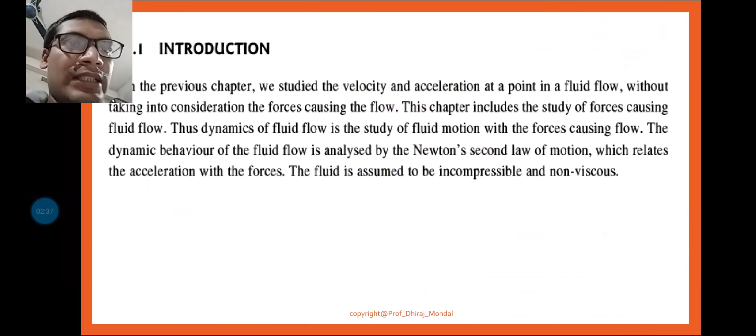I am going to discuss fluid mechanics, ME 303, for BTech second year students, and today we are going to discuss fluid dynamics. Last class I discussed the introduction to fluid dynamics, where Euler's equation of motion was discussed. We have seen this equation, which we got when the fluid is flowing through a streamline.

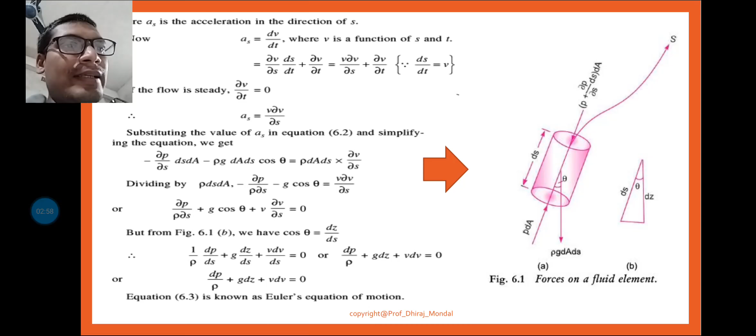Today we will be discussing Bernoulli's equation of motion, and how we can obtain it. Last class I told you that Euler's equation of motion is: del P by rho plus G into dz plus V into dV is equal to 0. This is Euler's equation of motion. Now if I integrate this equation, the integration of 0 is a constant, so integrating Euler's equation of motion, we will get Bernoulli's equation of motion.

So after integrating this equation, which equation do we get? P by rho plus G into z plus V square by 2 is equal to constant. Now, dividing by G, I can write it as P by rho G plus V square by 2G plus Z is equal to constant. This is Bernoulli's equation of motion.

So how is it obtained? By the help of Euler's equation of motion - after integrating Euler's equation of motion, we get Bernoulli's equation of motion. Now the question comes, what is this P by rho G? Basically this P by rho G is the pressure energy per unit weight of the fluid, very important, also called pressure head.

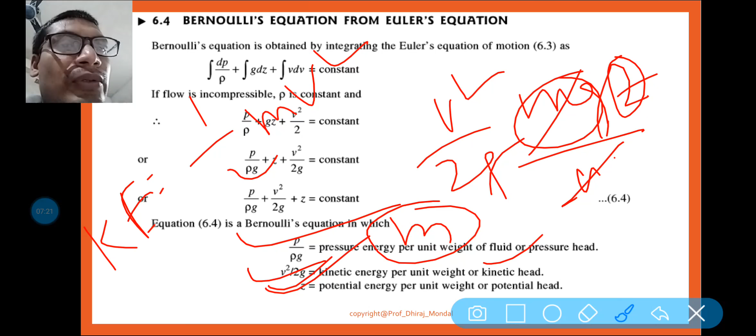So the Bernoulli's equation statement is that the algebraic sum of pressure head plus kinetic head plus potential head is constant at any section of the fluid when the fluid is incompressible in nature.

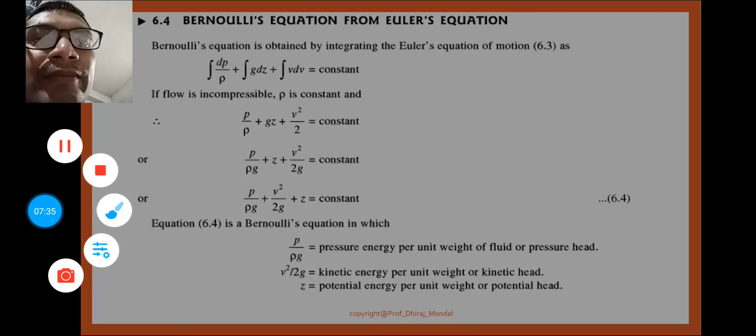There are some assumptions. The fluid flow should be ideal in nature, the flow should be steady, the fluid flow should be incompressible in nature, and the flow should be irrotational.

Now you can ask me, sir, what is irrotational? But I am not going to answer this in detail because it was already told many times in kinematics of fluid flow, what is rotational flow and what is irrotational flow. Again, when the fluid is flowing along an axis and also rotating with respect to its own axis, it is called rotational flow. If it is not rotating with respect to its own axis, then it is called irrotational flow.

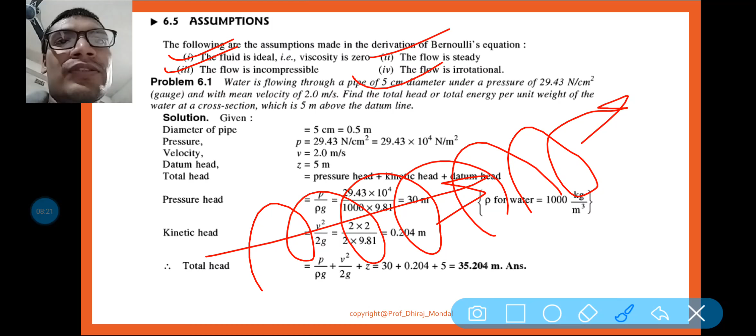In boundary layer theory, it will be discussed that when the fluid is flowing through this space near the boundary, the fluid flow is called rotational flow. When it is flowing through this free space, then it will be called irrotational flow. The significance of this will be discussed afterward.

But here you can see, to satisfy Bernoulli's equation, the fluid should be ideal, meaning viscosity is zero, mu is equal to zero. There should not be any kind of viscosity if it is satisfying the Bernoulli's equation.

That means Bernoulli's equation is telling that if this is section 1 and this is section 2, then at this particular point, the algebraic sum of pressure head plus kinetic head plus potential head is equal to the pressure head plus kinetic head plus potential head at point 2. So this is all about the Bernoulli's equation.

By the help of this Bernoulli's equation, numerous numerical problems will be solved. So here basically one assumption is what? This is the MCQ question which you can get, that what is the assumption of Bernoulli's equation.

First of all, the fluid should be ideal in nature, there should not be any kind of viscosity. The fluid flow is steady, that means the flow is not changing. The fluid characteristics like velocity, density, pressure should not change with respect to time, then it will be called steady flow.

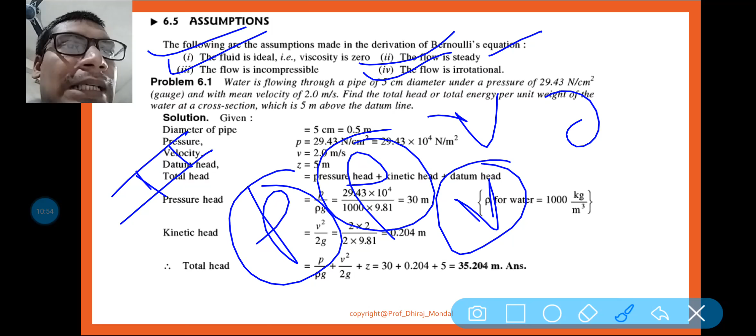Now, if the flow is irrotational, it means it will not rotate with respect to its own axis when flowing along an axis. So these are the four assumptions: the fluid is ideal, the flow is steady, the flow is incompressible, and the flow is irrotational in nature.

Okay, now let us solve a numerical which is very important, because based on Bernoulli's equation lot of numericals you have to solve, and later we will be seeing the application of Bernoulli's equation.

Question number 6.1: water is flowing through a pipe of 5 centimeter diameter under a pressure of 29.43 Newton per centimeter square gauge.

It is gauge pressure, so you know the relation between gauge pressure, atmospheric pressure and absolute pressure. Let us consider this is point A. P absolute is equal to P atmospheric plus gauge pressure. So absolute pressure is equal to atmospheric pressure plus gauge pressure.

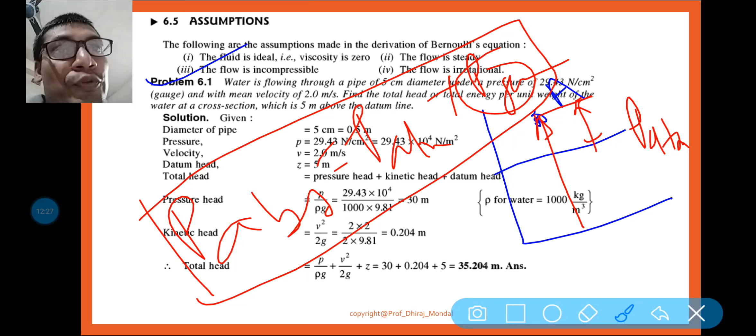So what is given here? Gauge pressure is given, only this pressure is given. That means gauge pressure is equal to absolute pressure minus atmospheric pressure. So after deducting the atmospheric pressure, that pressure is given, along with the mean velocity, the average velocity.

Find the total head or total energy per unit weight of the water at a cross section which is 5 meter above the datum. Let us consider this is a pipe, this one is your point 1, this is your point 2. Now let us consider this is your datum line. Now this height is your 5.

You have to calculate the total head. First of all, what is the procedure to solve a numerical - first see what data is given. So given data: diameter of the pipe is given as 5 centimeter, which you have to take in terms of meter, because all values should be in SI units. Pressure is given.

29.43 Newton per centimeter square - directly you can multiply by 10 to the power 4 so it will be in Newton per meter square. Nothing to discuss here, velocity is 2.0 meter per second. Z is equal to 5.

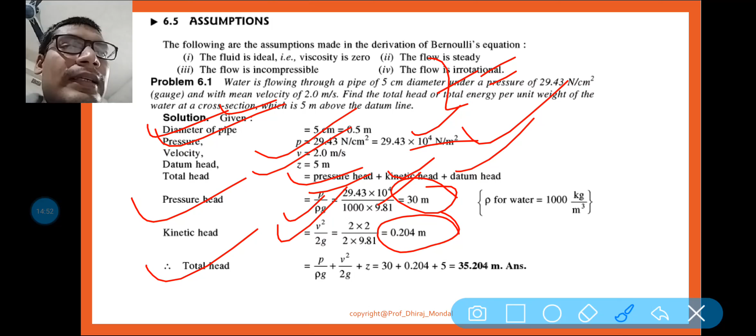So P by rho g plus V square by 2g plus z, so 30 plus 0.2 plus 5, giving 35.204 meter as the answer. So this is the total head.

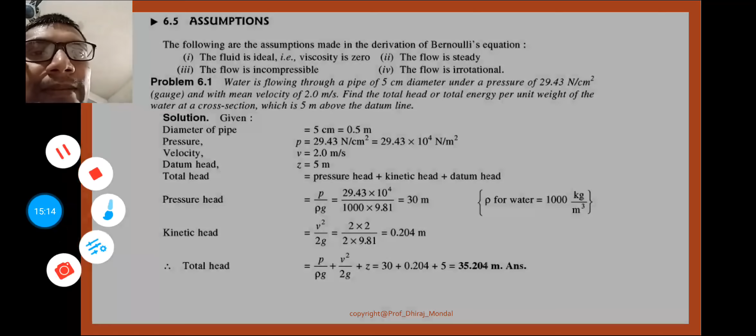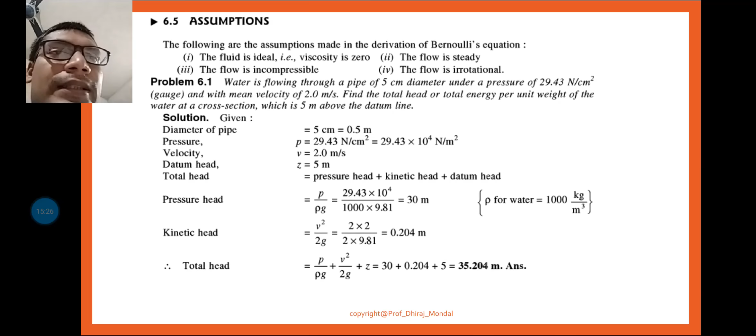This is when the fluid is flowing at a height of 5 meter - this is the total head above the datum line. So if we consider this is the datum line, then at that particular point, the total energy is pressure head plus kinetic plus datum head. I hope it is clear.

Next, come to the next problem number 6.2. It is basically similar type of problem. Here the continuity equation will be taken under consideration. Let us discuss the problem.

Go through the problem: a pipe through which water is flowing has diameter 20 centimeter and 10 centimeter at cross section 1 and 2 respectively. In this section diameter is 20 centimeter, in this section diameter is 10 centimeter.

Velocity of water at section 1 is given as 4 meter per second. Find the velocity head at section 1 and 2.

Also rate of discharge - rate of discharge means Q, which is equal to volume flow rate. So rate of discharge you need to find out, and also velocity head at section 1 and section 2.

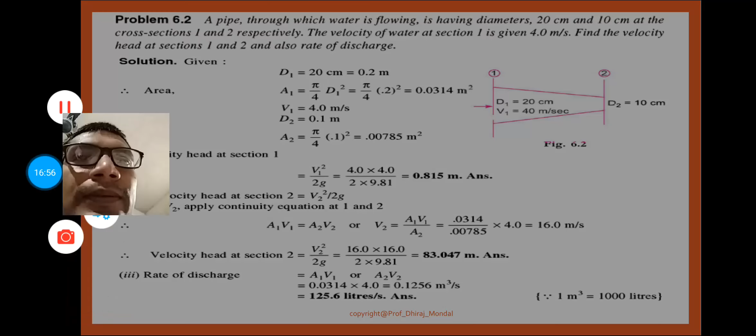Velocity head means - one minute please - velocity head means V square by 2g. So V1 square by 2g and V2 square by 2g you need to find out.

Let us discuss. First of all, the given data: D1 is given, area you can find out by pi by 4 d square. V1 is given, D2 is given, area A2 you can find out by pi by 4 d2 square.

So velocity head at section 1 is V1 square by 2g. Put the value of V1 and the value of G, and you get the velocity head at section 1 as 0.815 meter - this is your answer. Velocity head at section 2 is V2 square by 2g - but did you know V2? Because V2 is not given.

So how can you find out V2? You can find out V2 with the help of the continuity equation, because the continuity equation talks about conservation of mass. Total mass entering the system is equal to total mass coming out from the system. So the velocity, how can we find it out? A1 V1 is equal to A2 V2.

Remember, this continuity equation is applicable only for incompressible flow. If it is compressible in nature, then rho1 A1 V1 is equal to rho2 A2 V2. As it is incompressible in nature, rho1 is equal to rho2, so we take A1 V1 is equal to A2 V2.

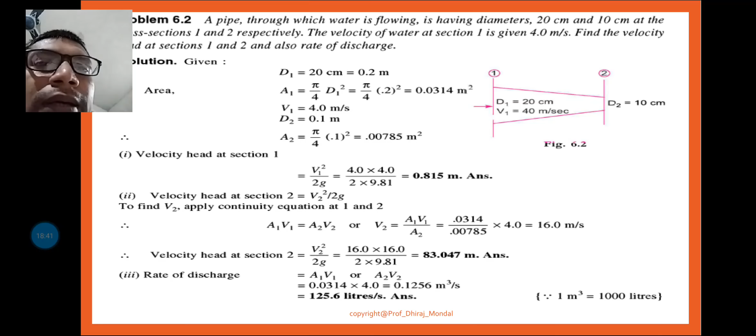Now put the value of V1, A1, A2, and you will get V2. V2 is equal to 16 meter per second. Am I right? So after calculation, this equation you can get.

Next, velocity head at section 2 is 83.047 meter. Rate of flow is what? Q is equal to area into velocity, so either you put A1 V1 or A2 V2, anything you put, you will get 0.1256 meter cube per second.

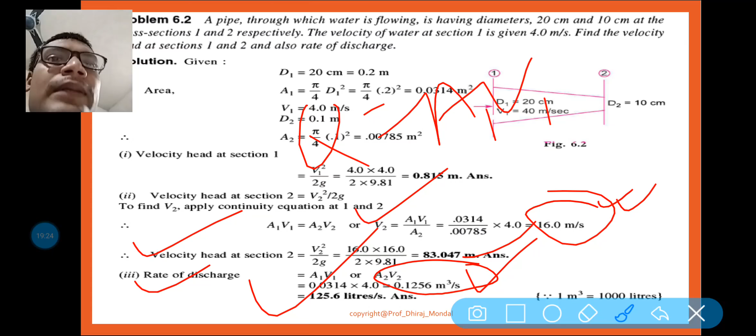If you want to take it in terms of liter per second, simply multiply by 1000. So 125.6 liter per second is the discharge.

Next, let's come to a very important theory. This is important for your exam, as this may be asked in the final exam: find out or derive the equation of Bernoulli's theorem from Euler's equation, and also derive the discharge formula for a venturimeter.

Okay, so let us discuss Bernoulli's equation for real fluid. In case of real fluid, when fluid is flowing, I already told you that in Bernoulli's equation the fluid is assumed ideal in nature with no viscosity, but in practice that is not possible.

So when the fluid is traveling through this point, there may be some frictional dissipation inside the fluid. There may be some frictional loss in this line. So we calculate HL, the head loss due to friction, and it is equal to 4FLV square by 2GD.

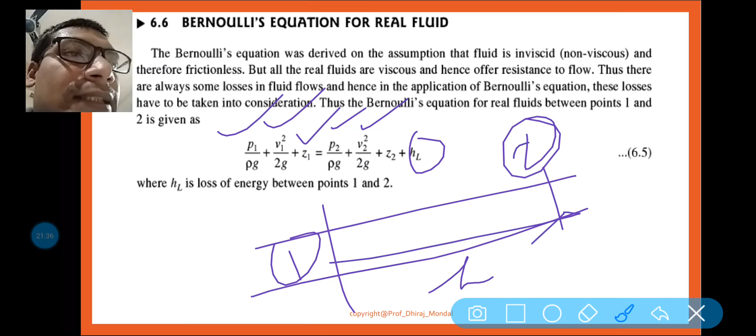So P1 by rho g plus V1 square by 2g plus Z1 is equal to P2 by rho g plus V2 square by 2g plus Z2 plus HL, the frictional head loss between section 1 and section 2. So this is the modified Bernoulli's equation, or Bernoulli's equation for real fluid.

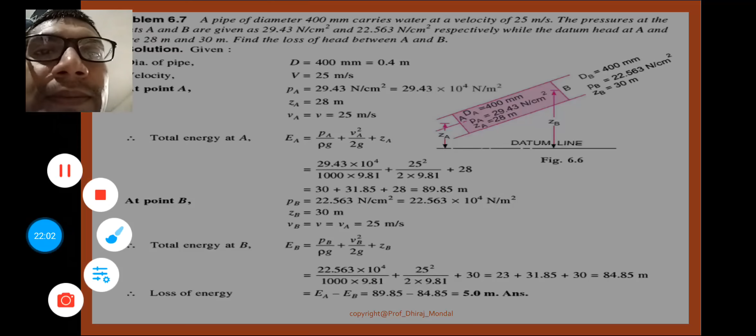Let us solve another numerical here. After that we will talk about the application of Bernoulli's equation. This numerical, it is telling that... one minute please. I am not going to discuss this numerical; this is your assignment, you can solve it at home. Next class we will discuss this numerical. I hope it will be alright.

Okay, so let us discuss the practical application of Bernoulli's equation. There are three practical applications of Bernoulli's equation: venturimeter, orifice meter, and pitot tube.

Venturimeter is a device basically used to measure the rate of flow of a fluid flowing through a pipe. Orifice meter is also a measuring device used to measure the rate of flow. We will talk about orifice meter in the next class.

And also pitot tube. Pitot tube is basically used to measure the velocity when the fluid is flowing. So the first two are for measuring discharge, and the third one is for measuring velocity - Q and velocity, discharge and velocity.

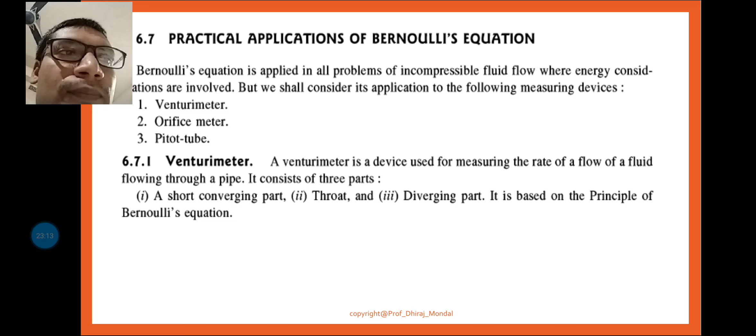So let us discuss the venturimeter. Already I have told the definition: it is a device used for measuring the rate of flow of a fluid flowing through a pipe, and it consists of a converging part, a throat, and a diverging part. It follows the principle of Bernoulli's equation. So let us discuss the derivation or expression of Bernoulli's theorem.

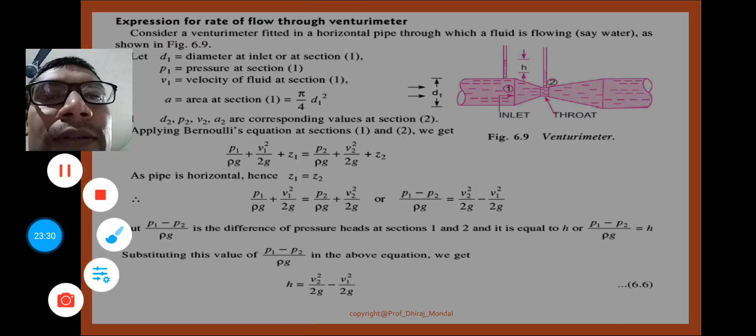Here you can see. Okay, let me disable this. Okay, you may see here.

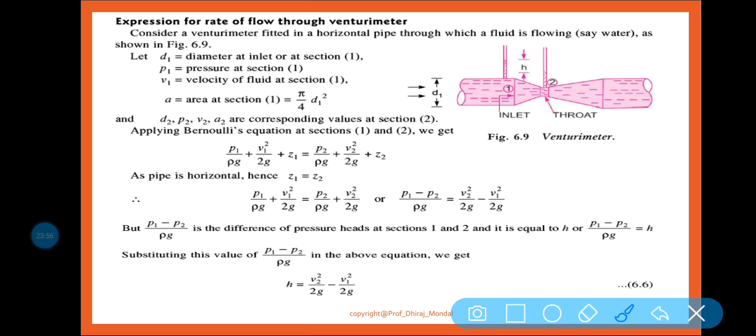We are going to discuss the Bernoulli's equation, how the expression is derived, and how we can find the discharge. So consider this is your venturimeter, where this is your pipe, and this is also a pipe, and this is your converging part, this is your diverging part.

This point is clear. Now the pipe diameter is D1. Here it is your piezometer used for measuring the pressure head. This is also a piezometer used for measuring the pressure head, or you can put a U-tube manometer here to measure the pressure head by the help of this mercury column.

So here it is called your throat, this is your converging part, this is your diverging part. Now what we are going to discuss here is the expression of the venturimeter. So let us consider d1 is the diameter of the pipe, p1 is the pressure at section 1,

v1 is the velocity of the fluid at section 1. Now we can find out the area. Now put the Bernoulli's equation between section 1 and section 2: P1 by rho g plus V1 square by 2g plus Z1 is equal to P2 by rho g plus V2 square by 2g plus Z2.

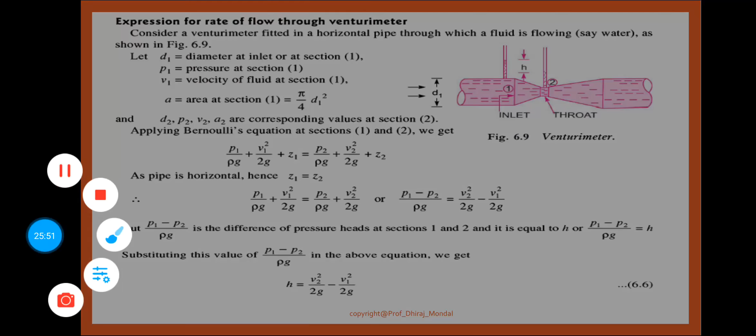Am I right? Now Z1 is equal to Z2 because the datum line is the same, horizontally placed. So Z1 equals Z2. Now we can write the equation as: P1 by rho g plus V1 square by 2g is equal to P2 by rho g plus V2 square by 2g, or it can be written that P1 minus P2 by rho g is equal to V2 square by 2g minus V1 square by 2g.

Now this P1 minus P2 by rho g is basically the head difference, H, the pressure head difference. So pressure head difference is equal to V2 square by 2g minus V1 square by 2g.

Now we need to find out the discharge. So Q is equal to either A1 V1 or A2 V2. So you need to find out the velocity V2 if you are taking A2 V2. So velocity V2 is equal to root over 2gh. So this equation up to this point is clear, right?

So with H, I can take the continuity equation A1 V1 equals A2 V2. Basically I want to replace V1 in terms of V2. So V1 is equal to A2 V2 by A1. So H is equal to V2 square by 2g, and putting the value of V1 here, you get this equation.

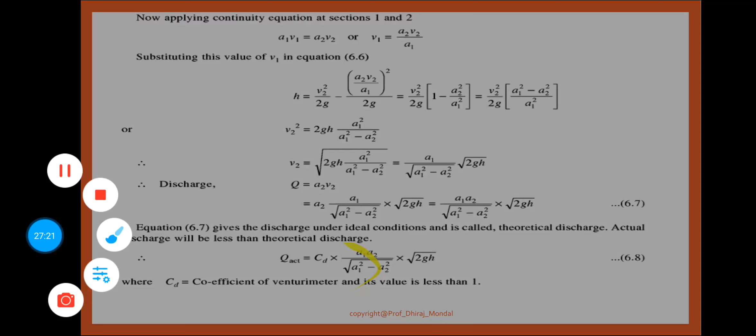So ultimately taking V2 square by 2g as common, we get 1 minus A2 square by A1 square. So this is your equation. So V2 square is equal to 2gh into A1 square by A1 square minus A2 square. So V2 is equal to root over 2gh into A1 square by A1 square minus A2 square. So ultimately this is your V2. Clear?

So ultimately, Q is equal to A2 V2. I already have V2, so substituting A2 into the value of V2, ultimately we get A1 A2 by root over A1 square minus A2 square into root over 2gh. So this comes by the help of Bernoulli's equation. So Q is equal to A1 A2 by root over A1 square minus A2 square into root over 2gh.

And this H is the pressure head difference. So how can we find the Q actual? This is all about Q theoretical. Q theoretical is equal to A1 A2 by root over A1 square minus A2 square into root over 2gh.

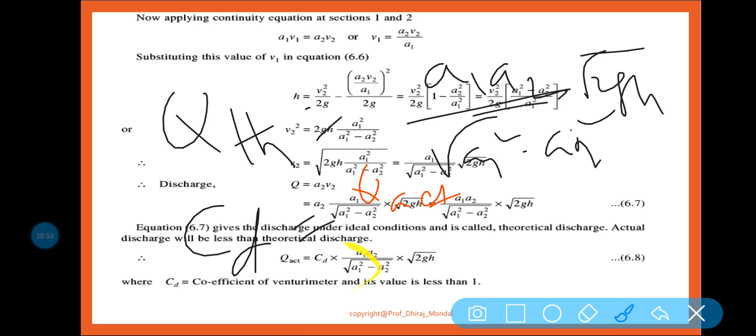Now CD is equal to what? We know that CD is equal to Q actual by Q theoretical. So Q actual is equal to CD into Q theoretical. Putting the value of theoretical discharge, you get Q actual equals CD into A1 A2 by root over A1 square minus A2 square into root over 2gh. So this is all about it, and CD is the coefficient of discharge, and its value should be less than 1.

Now there is a case where this value H is the pressure head difference. So in case if you are taking this, let us consider this is your venturimeter. Now in case, let us consider we are taking this U-tube manometer.

Let us consider the Mercury column is given some x difference, head difference. So if it is taking Mercury and there is water, how can we find out this head in terms of water? H is equal to x into SH by S naught minus 1. This equation is very very important.

Here SH is the specific gravity of the heavier liquid, let us consider Mercury, so 13.6 by specific gravity of the flowing fluid. This one is your manometric fluid, and this one is your flowing fluid. For water, specific gravity of the liquid flowing through the pipe is 1.

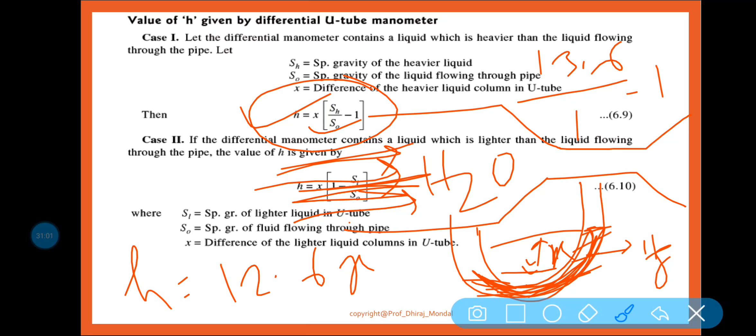So ultimately if it is Mercury, we can write H is equal to 12.6 x. Whatever x we get, we multiply that x with respect to 12.6 by 12.6, and then you will be getting capital small h. Small h is the pressure head difference.

Now in case the flowing fluid has specific gravity heavier than the specific gravity of the manometric fluid, then this is the equation: H is equal to x into 1 minus SL by S naught.

Remember, S naught will always be in the denominator position, that means in the bottom, and in the numerator position SL. SL is the specific gravity of the lighter liquid.

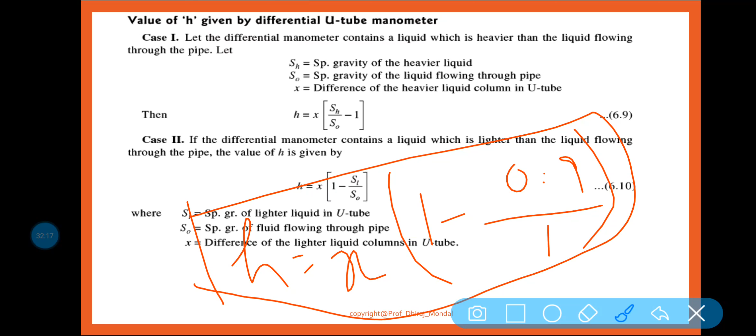So in case I am talking about petrol or diesel, specific gravity is 0.9 or 0.7, so 1 minus, just to eliminate that negative, because head should not come out negative. For eliminating this negative sign, you have to take these two equations.

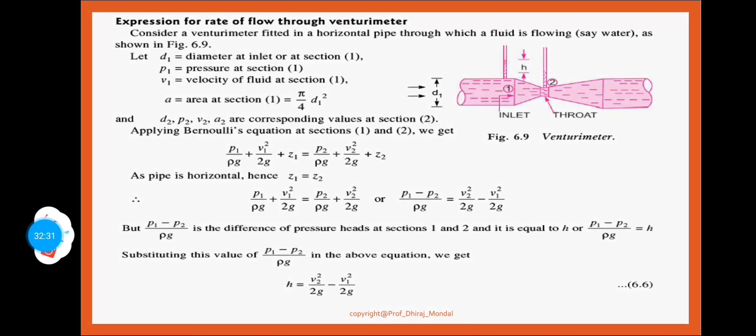So this is the phenomena of how we can find out the head. Basically what happens here is we are just putting one U-tube manometer with Mercury, and in terms of the Mercury column, the head is given as x in terms of the manometric fluid.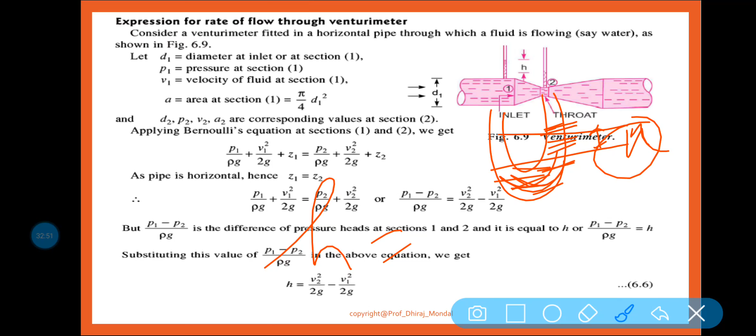So if you want to replace that x into head of water, then this is your equation, which is basically useful for solving the numerical.

In case the venturimeter is inclined, this is the condition: inclined venturimeter with differential U-tube manometer. At that time the piezometric head, means you have to take P1 by rho g plus z1 minus P2 by rho g plus z2, is equal to the pressure head difference.

Ultimately it is equal to x into SH by S naught minus 1. So this is your equation, case number 3, in case the venturimeter is inclined. Then Z1 and Z2 will be taken under consideration.

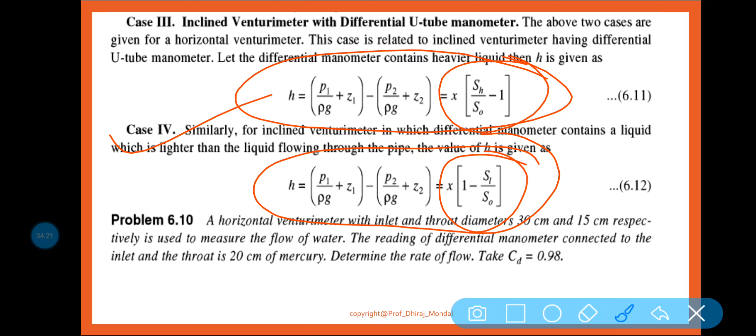Next, case number 4, for inclined venturimeter in which the differential manometer contains a liquid lighter than the flowing liquid. The formulas are x into SH by S naught minus 1, and x into 1 minus SL by S naught.

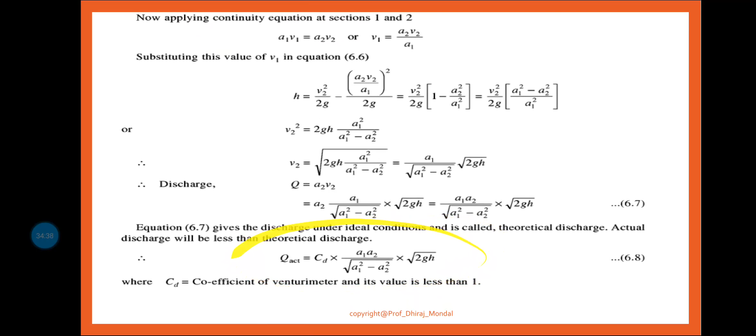So I hope it is clear how to find out the H in case of inclined venturimeter and in case of horizontal venturimeter, and this is your actual discharge formula, which is very important when solving numericals.